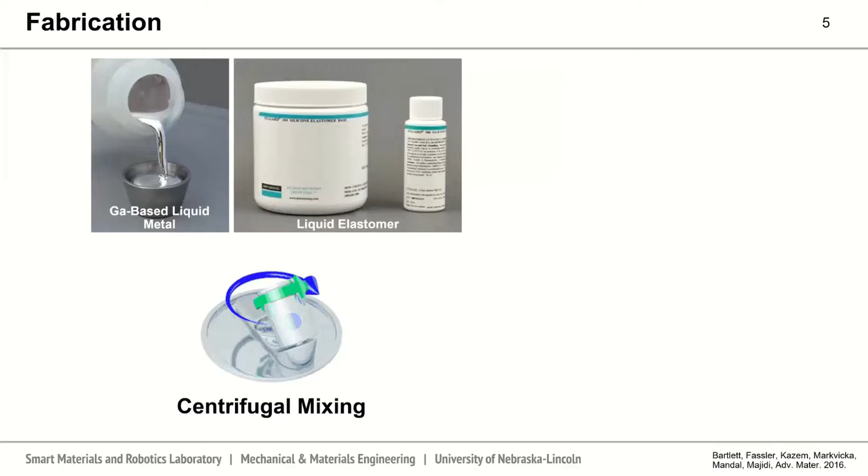We are focused on encapsulating this liquid metal into an elastomer composite. We do this by mixing some volume ratio of the liquid metal plus elastomer, and combine this in a centrifugal mixer. What we get out of this is the formation of droplets within the composite. They're independent droplets, as you can see in the nano CT scan on the right, with no droplet-droplet interaction. So even at very high volume loadings, up to 80% by volume, we're able to create composites that are electrically insulating.

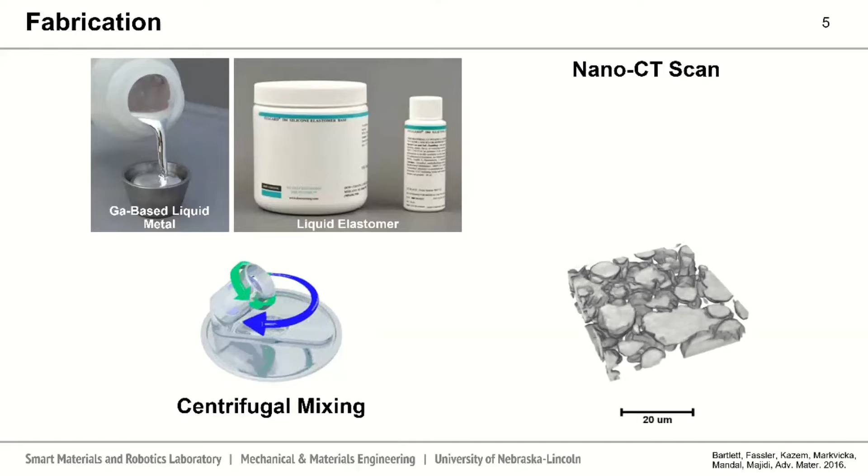This is important, especially if we talk about potentially thermally conductive elastomers. In some cases, we want these to be electrically insulating. Here is a graph that shows the thermal conductivity of these composites as a function of the volume loading of the liquid metal in the composite. We see an increase as the loading of liquid metal increases from 0 to 50% by volume. One really unique aspect of this is we see a negligible change in its modulus as a function of loading all the way up to 50%, while remaining very highly elastic, having strains up to 600% before break.

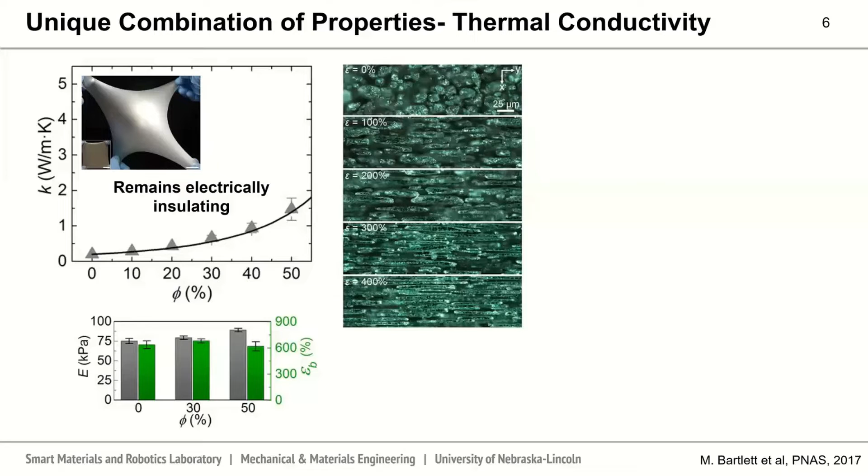Due to the liquid phase nature of the filler, the liquid metal droplets actually deform along with the elastomer matrix as a function of stretch. In the top image, you see spherical droplets in the elastomer matrix. In the bottom image, at 400% strain, you see long needle-like inclusions. If we measure the thermal conductivity in the direction of strain, we actually see a significant increase compared to the base elastomer matrix. This increase in thermal conductivity begins to approach some rigid metals, such as stainless steel, and is ultimately a 50x increase over the original host elastomer composite when strained up to 400%.

It's a pretty unique combination of properties. This material is soft and rubbery, but then exhibits some properties only really seen in rigid metals, such as very high thermal conductivity approaching 10 watts per meter Kelvin. This is really where the first project I'll talk about today comes in: lightweight liquid metal elastomer composites. This work was led by a graduate student in my lab, Ethan Krings, in collaboration with two other groups at the University of Nebraska-Lincoln, led by Jeffrey Shield and Sangjin Ryu.

So what I've shown up to this part is usually to get these highly functional properties, these elastomer composites are typically loaded up to really high volumes, up to 50% by volume, or greater than 85% weight of the liquid metal. And this large mismatch in the density of the elastomer and the liquid metal filler is really problematic to weight-sensitive applications, such as aerospace, and also large area electronics and thermal management.

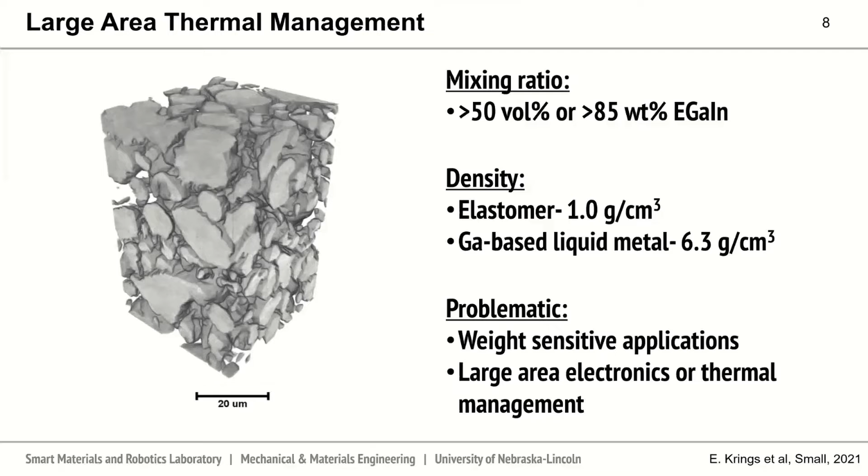So in this project, we began to try to understand and uncover the influence of the properties of the filler on the ultimate properties of the composite. Here we're looking at the density of the particle filler on the left as a function of the loading of this particle filling elastomer matrix.

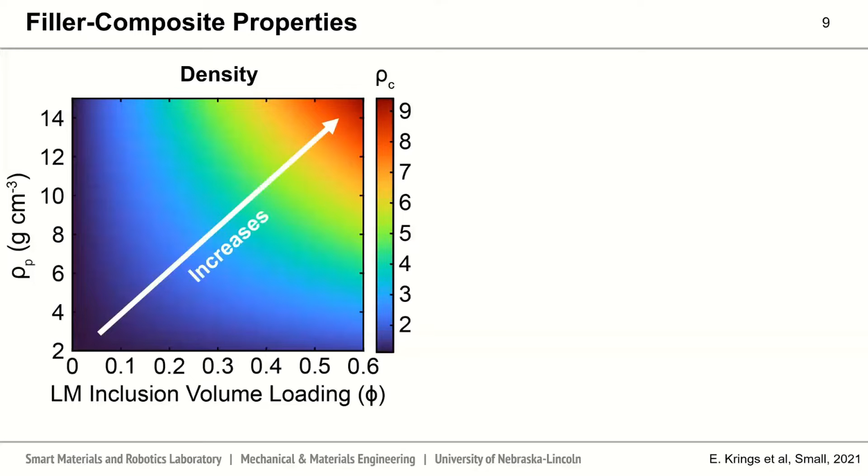The color map describes the density of the composite. And what we see here, and sort of as expected, as the density of the particle filler increases and the volume loading of that particle filler increases, the density of the composite increases.

If we look at the thermal conductivity of the particle filler as a function of the volume loading of this particle filler in the composite, where the color map shows the thermal conductivity of the composite, we see a different trend. We really see a major increase in the composite thermal conductivity only as we increase the volume loading of this filler within the elastomer matrix. And we see nearly constant thermal conductivity after some level of thermal conductivity of that particle filler.

So to conclude this, we see that the density of the particle filler is proportional to the density of the composite, which is as expected. We also know that the density of the particle filler is proportional to the thermal conductivity of that particle filler. But counterintuitively, the thermal conductivity of the particle filler is not proportional to the thermal conductivity of the composite, and remains nearly constant above some level.

So from this, we can see that if we decrease the density of the particle filler, we'll decrease the density of our composite, whereas if we decrease the thermal conductivity of our particle filler, we'll actually see a negligible change in the thermal conductivity of our composite. This offers us a new design space where we begin to optimize not only the functional properties of these composites, but also the density.

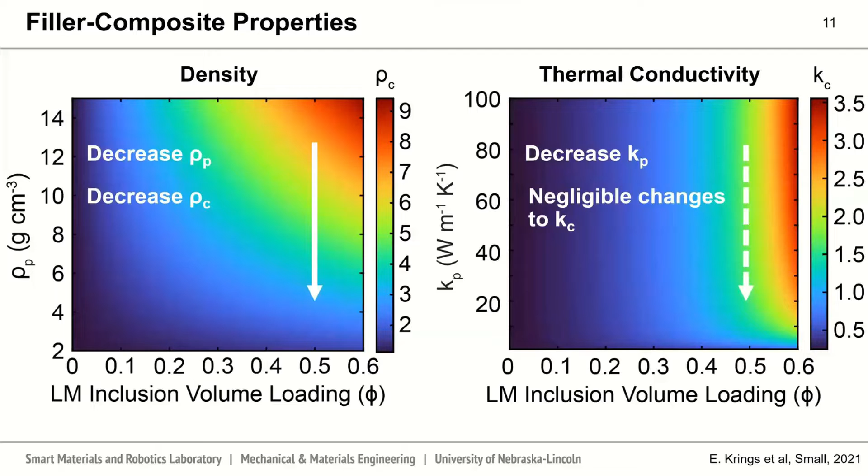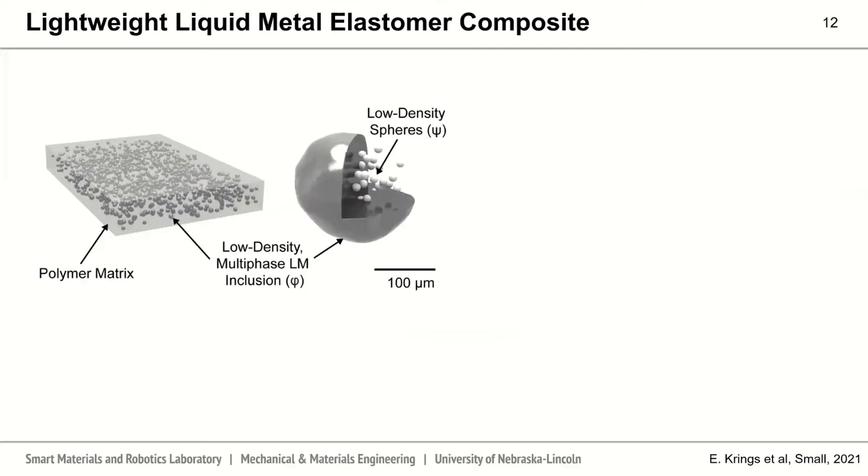So to do this, what we've done is we've introduced a secondary phase into this composite. Now we're introducing a low density phase into our liquid metal filler. This mixture is then loaded into the elastomer as before.

This nonlinear relationship then allows us to independently tune the density or thermal conductivity or the functional properties of this composite.

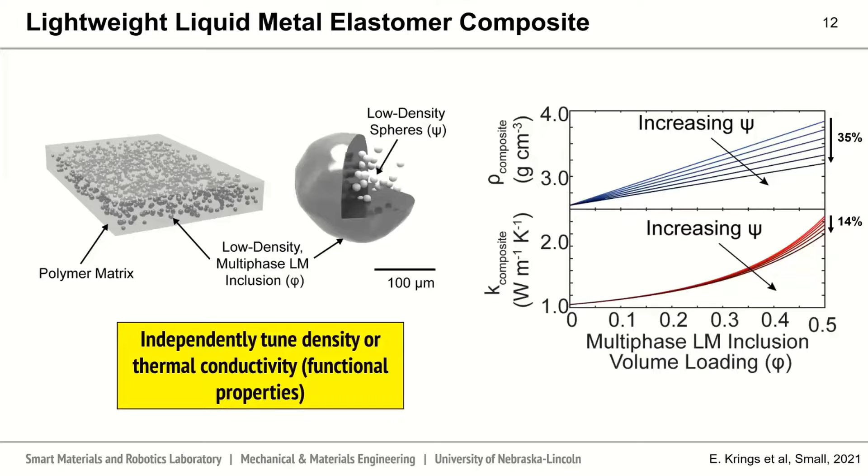Finally, we can create a design map from this. So we see the volume loading of the low density phase on the y-axis within the multi-phase filler, and on the x-axis we have the loading of this multi-phase filler into our elastomer composite. The color map shows this ratio of the thermal conductivity of the composite to the density of the composite.

And on top of this, we can draw lines of constant thermal conductivity, shown in black, or lines of constant density, shown in white. This really opens up a very large design space, right? The addition of this low density filler adds this design space from the y-axis of this plot. So we add a bunch of freedom and tunability into this composite by adding a second phase to our liquid metal filler.

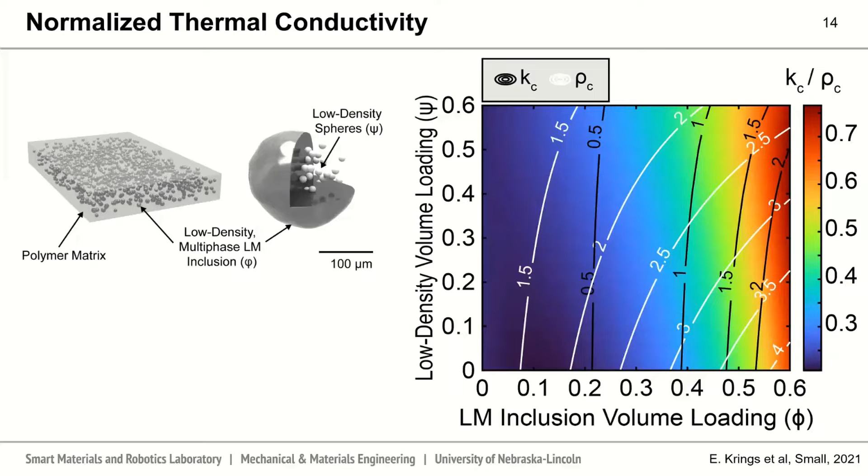From this, we experimentally verified this theoretical model. Our red line here is a line of constant density, where we're able to tune the thermal conductivity independent of the density of the composite. The blue line shows a line of constant thermal conductivity, so here we can maintain our thermal conductivity, but change its density for our application.

So here our goal is really to decrease its density. The images on the right show these three samples suspended within a column of heavy liquid, where we have samples that are able to float in this column, ones that sink, and ones that are suspended in the middle.

The image on the right then shows each of these materials pulled out of the liquid and used as a thermal heat spreader, where there's a resistive heater embedded within each of these, and we see a very similar thermal response to this applied heat load. So this verifies that we're able to independently tune the thermal conductivity and density of these composites by introducing a new phase into the liquid metal.

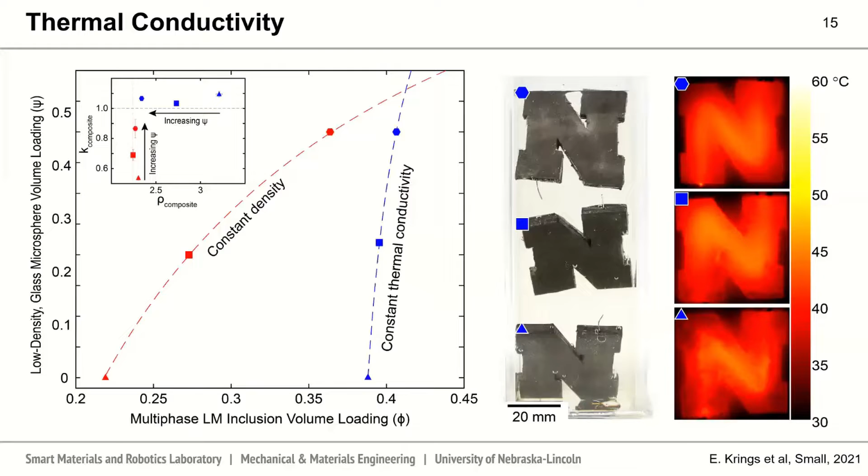The next aspect of this work leans towards additive manufacturing to enable spatial control of the microstructure of these liquid metal droplets within the elastomer composite. This project was in collaboration with Michael Bartlett's group from Virginia Tech, led by Aaron Haake from my group and Ravi Tutika from Michael Bartlett's group.

We are also interested in tailoring the thermal conductivity of these composites. At this point we have two knobs to do that: we can increase the loading of the liquid metal within the elastomer composite to increase thermal conductivity, or we can increase the aspect ratio of the liquid metal filler within the composite, which increases thermal conductivity in the direction of that change in aspect ratio.

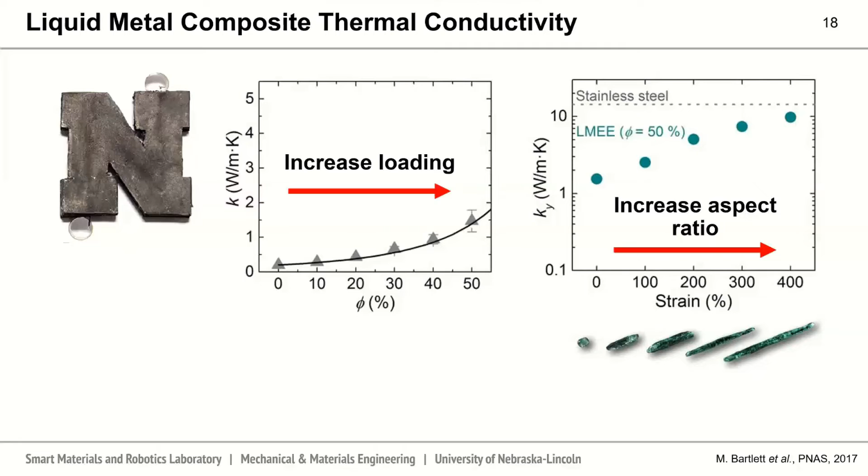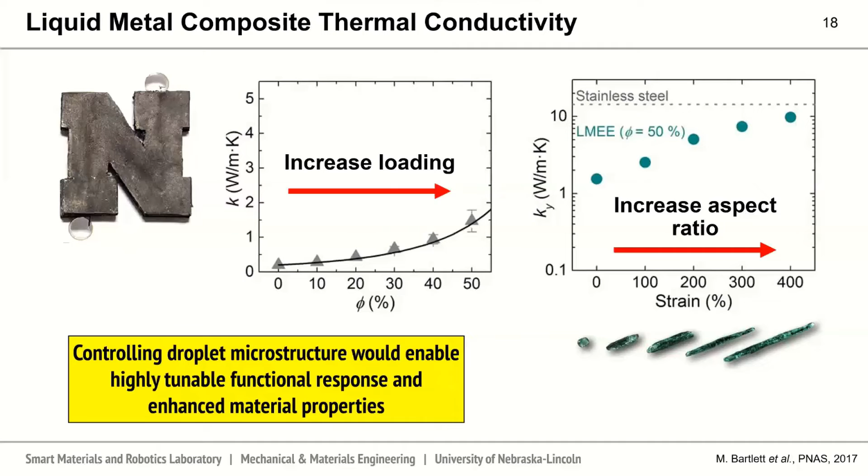However, at this point, the only way we can achieve a change in aspect ratio is through mechanical stretching, which ultimately leads to programmability in only a single axis. We see that controlling droplet microstructure would enable highly tunable functional response and enhanced material properties if we were able to spatially control that throughout an elastomer composite.

Through looking at literature, we see that alignment can be caused by shear forces during direct ink writing if the ink includes high aspect ratio fillers. These fillers align as they move through the nozzle.

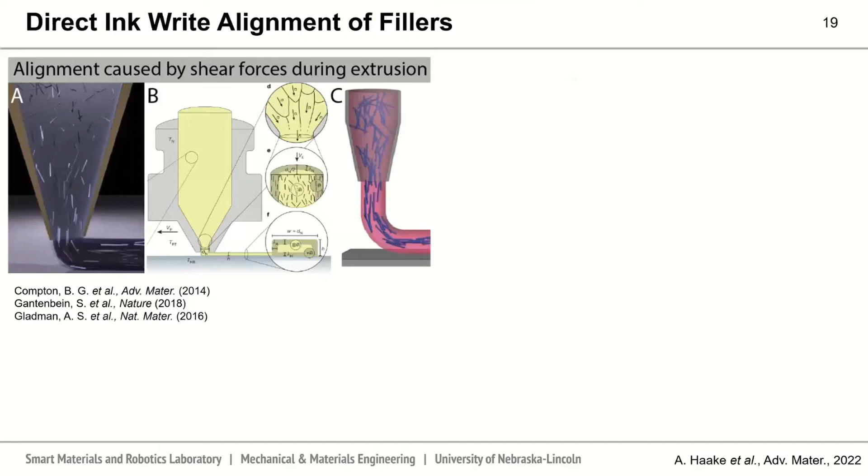If we print the elastomer composite as an emulsion - liquid metal droplets within a prepolymer matrix - we see almost no visible change in the microstructure of the liquid metal droplets before and after printing. Even looking at a zoomed-in microscope image of the nozzle as the material is extruded, we see primarily spherical droplets throughout the length of the nozzle before and after extrusion.

We hypothesize that solid-liquid emulsions offer new opportunities to not only control the orientation of particle fillers, but also the shape of the liquid inclusions during direct ink writing.

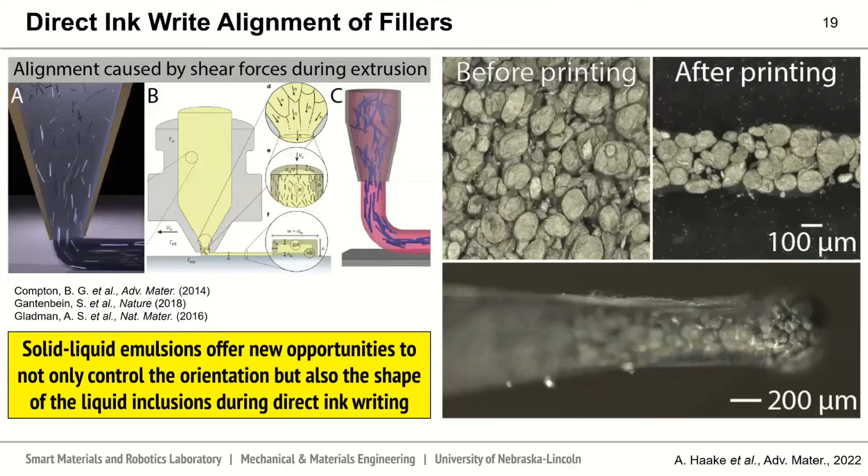For this, we did a parameter sweep and looked at two specific parameters: the non-dimensionalized printhead velocity - the ratio of printhead speed to extrusion speed - and the nozzle height with respect to the print bed.

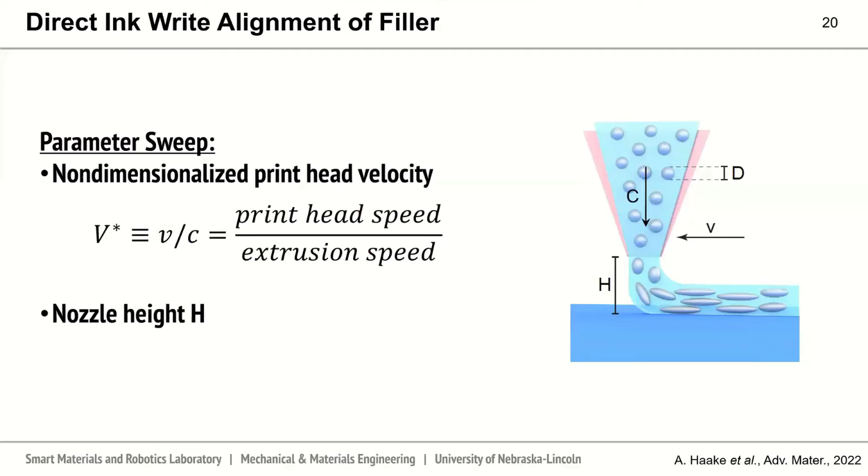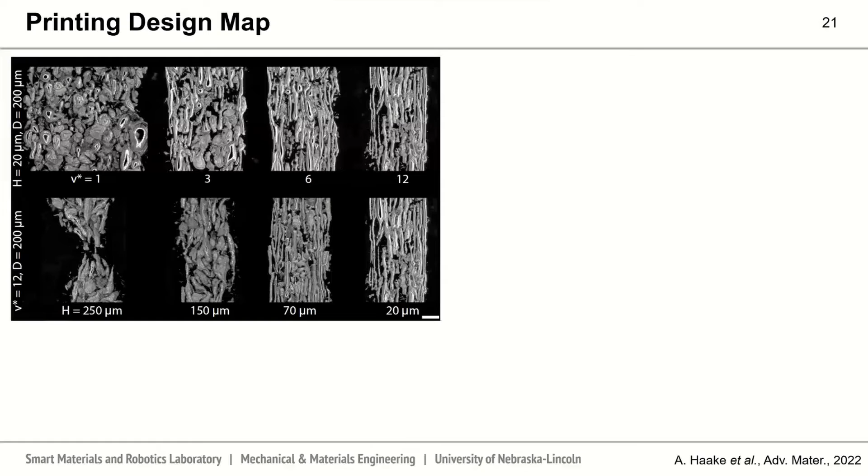We observed a change in aspect ratio as V-star, this normalized velocity, is increased from 1 to 12. We also saw an increase in aspect ratio as the height of the nozzle with respect to the print bed is decreased from 250 microns all the way to 20 microns. From 16 independent experiments of velocity and height, we were able to formulate a design map.

We see on the left hand primarily spherical microstructures, all the way to needle-like microstructures on the right, in about a distance of 13 millimeters. So we're very quickly able to change the aspect ratio of these particle fillers throughout a printed part.

With this, we're not only able to change from spherical to elongated droplets, but we can actually go back and create connected networks from any of these microstructures within the materials. This is enabling in the fact that we are able to use a single ink, one nozzle, and achieve multiple properties throughout a printed part with spatial control.

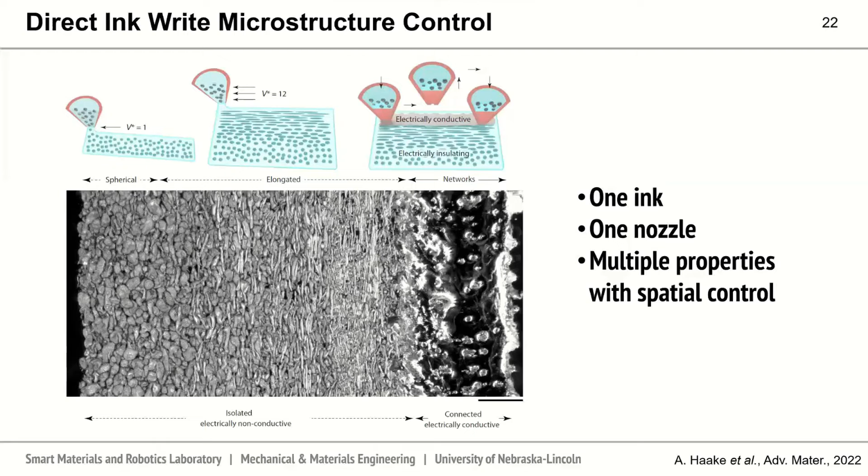We can begin to create unique architectures that have never been shown before - not possible with previous methods - such as curvilinear type architectures throughout a printed part. We can alternate within a single part between spherical and elongated droplets right next to each other.

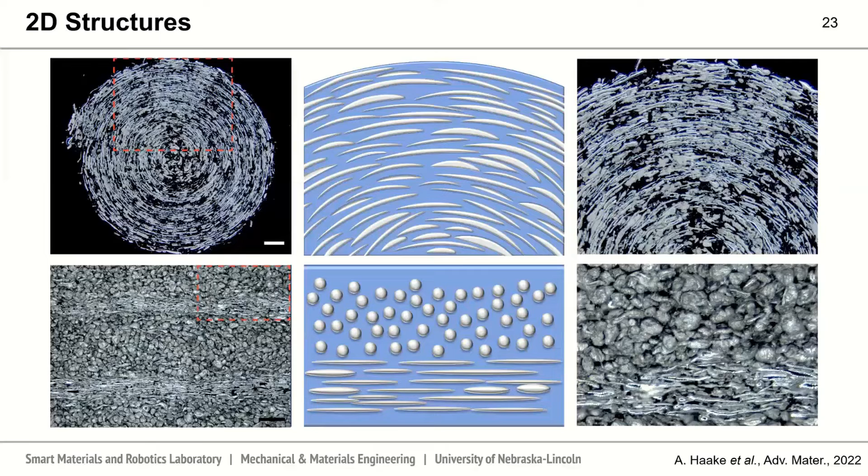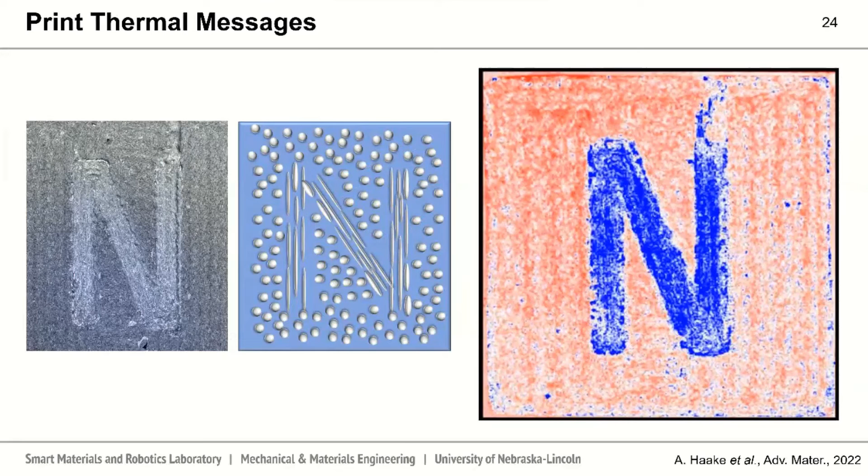We can start to print thermal messages. Here we have highly elongated droplets surrounded by spherical droplets. This allows us to encode a thermal message, or even create a heat spreader, within a material.

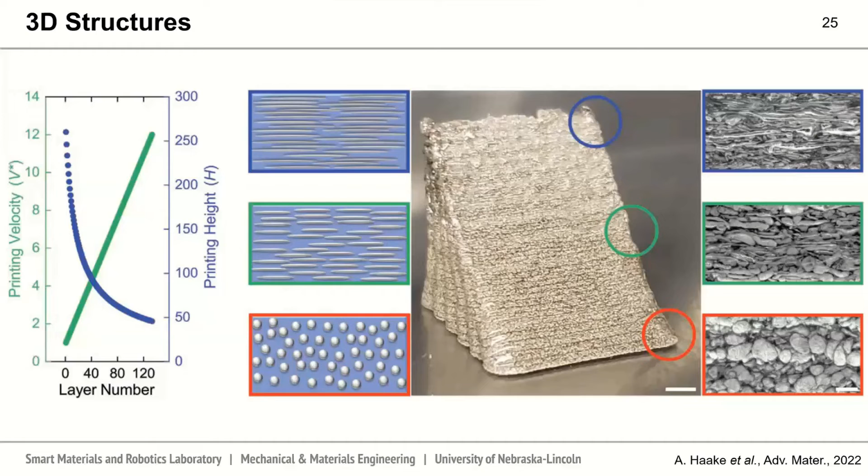We can expand this from 2D to 3D structures, where we begin to tailor the printing parameters - the normalized velocity as a function and printing height for each layer in our composite. This allows us to create layers with spherical droplets on the bottom all the way to highly elongated inclusions on the top of this prismatic triangle.

We can add other print heads to our 3D printer, and now we can do multi-material printing, so we can embed highly thermally conductive heat sinks within traditional elastomeric materials. As expected, we see significant reduction in the heat around the light emitting diodes located in the bottom left and top right corner, where these heat sinks or heat spreaders are embedded within the material, versus buildup of heat where the elastomer composite remains.

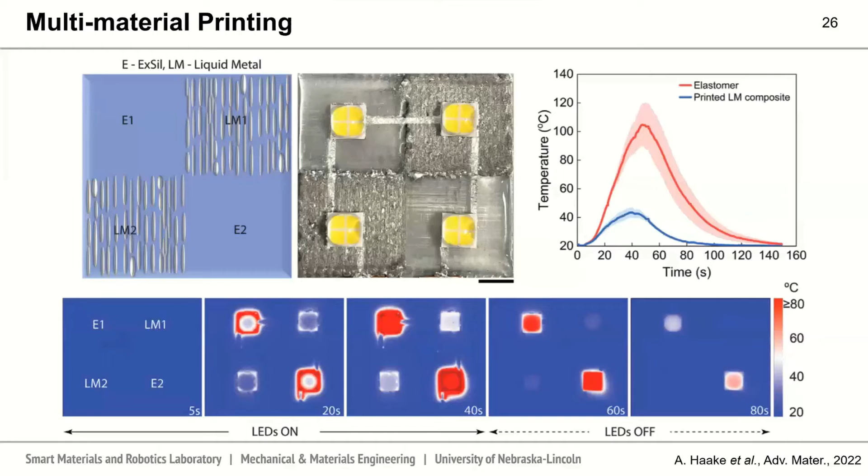Hey Melissa, I maybe have a question just to get the ball rolling here.

Eric, this is pretty interesting stuff here. But I just wanted to see, from your perspective, what sort of applications you have in mind. I could see this being a potential use for a space application, something like a heat spreader where you can finely tune something that's pulling heat away from a printed circuit board and control the thermal conductivity there. But did you guys have some applications in mind or some things you're already looking at?

Yeah, we envision this material could be used as conformal coatings within circuit boards. These could be complex geometries between mating parts that are currently potentially thermally insulating materials. Now we'll be able to potentially pull heat away while remaining electrically insulating. And then anything that interfaces with the human body, so potentially liquid cooling garments, things of that nature that require mechanical conformability but require highly functional properties.

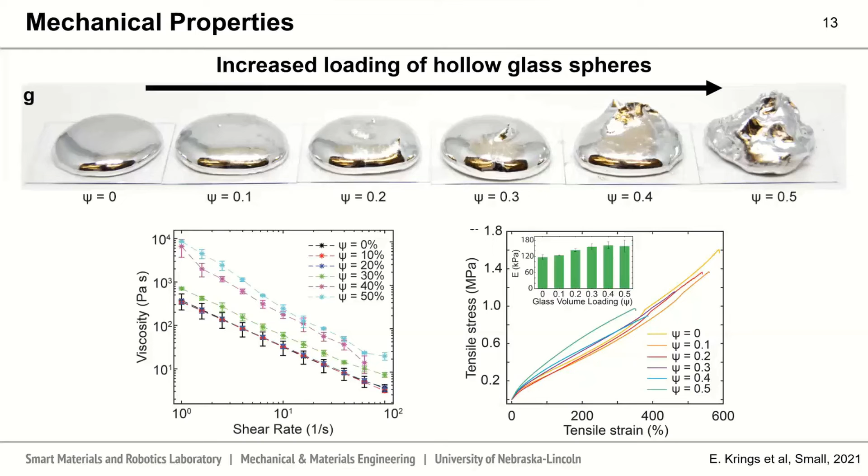That's actually something we're studying right now that hasn't been studied in literature yet. So understanding how the modulus of these materials changes as a function of its microstructure. Up to this point, we see very little changes. They're almost undetectable on some scale, and we are really trying to understand if these changes in modulus are a function of the printing and potential changes in chain alignment of the polymer, or actually a function of the microstructure of the liquid metal.

Another question Susan asks is, does the liquid metal influence the EMI shielding capability of the elastomeric polymer? Yes, you'll get... this isn't something we've studied, but it has been shown in literature that you will get an increase in EMI shielding performance as the loading of liquid metal is increased.

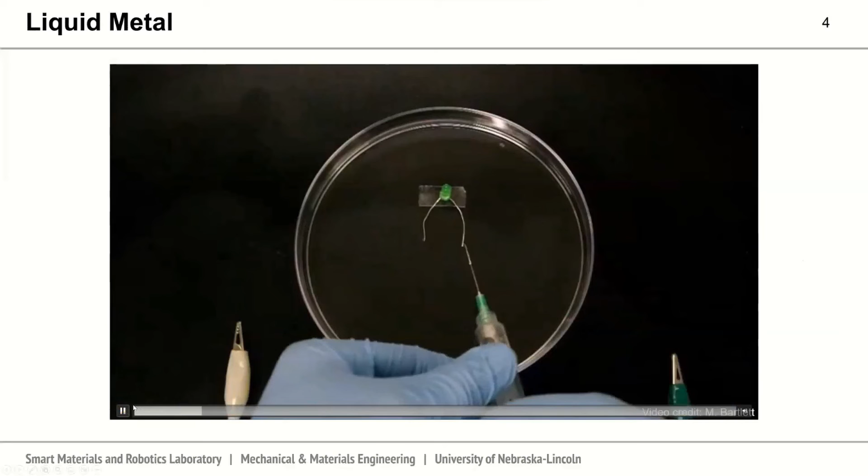Is there leakage of the liquid metal out of the elastomer matrix? Yeah, so there is negligible, almost no liquid metal leakage out of the elastomer matrix. One of the really unique aspects of the liquid metal is that even if a droplet were to be fractured, the spontaneous formation of the oxide skin prevents it from leaking out.

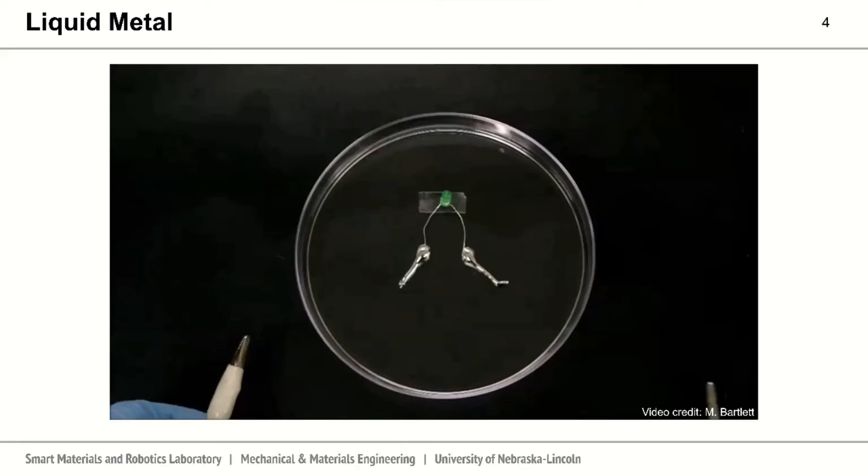And that's analogous to this, where the oxide skin almost spontaneously forms and really prevents flow of the metal. Yeah, if you make the droplets really small, somewhere around a micron or smaller, it then becomes really, really difficult to even cut through a droplet. So there are a number of techniques to ultimately prevent that from happening.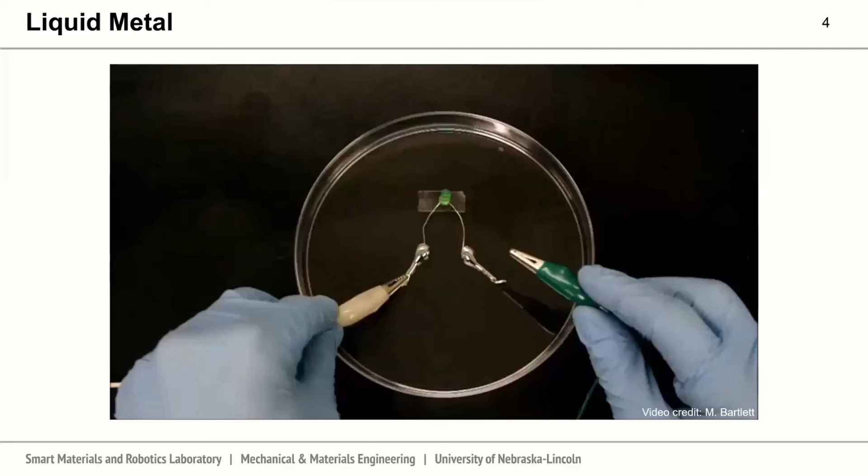Can you orient the liquid metal needles perpendicular to the print plane for enhanced thermal pads, or is it limited to the in-plane direction? That's a really good question. Currently our direct ink writing setup is primarily limited to the plane. You could potentially create a very tall, slender structure and orientate it perpendicular to the plane, though that might be difficult. There's also been research integrating ferromagnetic particles into the liquid metal, then curing the composite within a magnetic field to orientate it. But our direct ink writing process as is, is primarily limited to in-plane.

We have one more question related to the last one: can the liquid metal reseal itself in a vacuum environment? That's a really good question. I assume this is related to the formation of the oxide skin, which forms in the presence of minimal oxygen. We have collaborators at the Air Force Research Laboratory with a state-of-the-art glove box where they've tried to minimize oxygen, and they still get formation of the oxide skin. Studies have shown even as little as 10 parts per million oxygen can cause the oxide skin to form on these liquid metals. The dissolved oxygen in the elastomer or other materials is more than sufficient to form the oxide skin on these droplets. It requires very, very little oxygen.

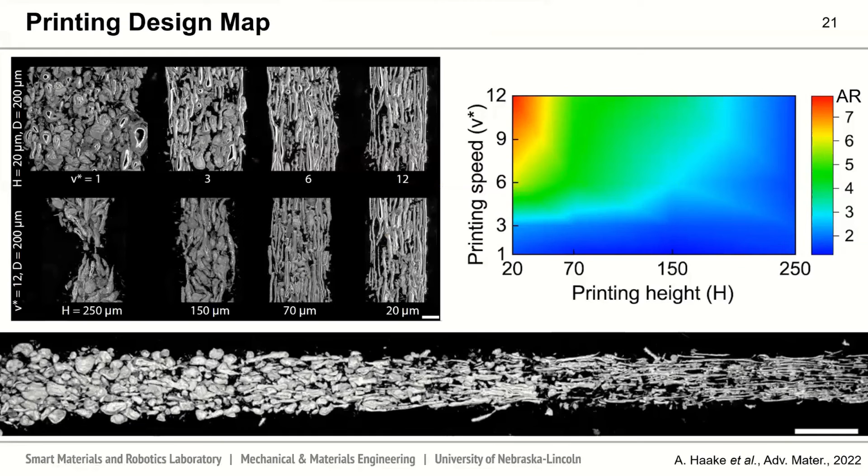Another question: rough estimate of the range of orthotropic thermal conductivity ratios, do you have a rough estimate? I had a graph in here, but it looks like I didn't include it. We see a pretty significant increase in the direction of strain of the thermal conductivity. In the perpendicular direction, in X and Z, we see almost a negligible change in thermal conductivity, almost no decrease. It remains almost nearly constant.

Another question, this one from Sean Breeding: do the droplets have a pore pressure? If so, how does the elastomer behave when subjected to a vacuum environment? Would it swell in thickness? That is a really good question. I don't think they have a pore pressure, but I would assume they wouldn't - I don't know, I haven't thought about that enough. We've definitely put them in desiccators under not-crazy vacuums, and they don't swell or begin to leak out, as we've been able to visually observe, but we've never looked at this on a microscopic level.

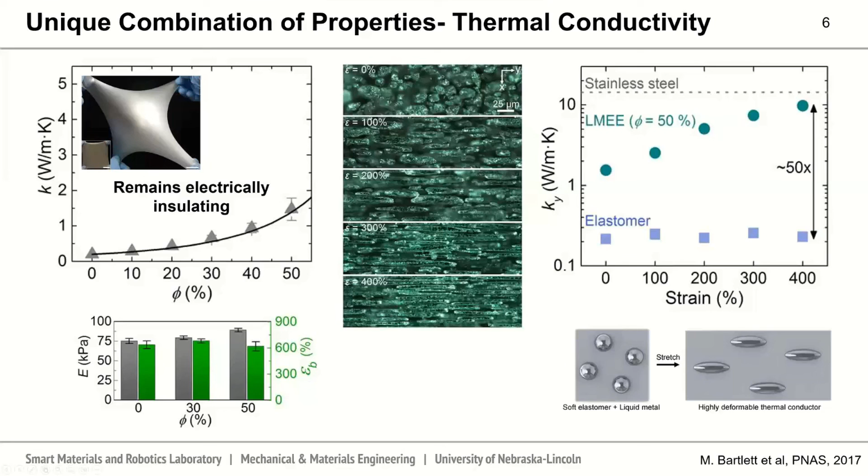Another question: does the liquid metal have a max allowable temperature, and does that differ from the elastomer? That's a really great question. The max temperature of some of the polymers we're using is a few hundred degrees Celsius, probably 250 to 300. The max temperature of the liquid metal is in the thousands of degrees Celsius, so it's beyond most of the polymers we use. One of the really critical temperatures is actually the minimum - when does it transition from liquid to solid? In its bulk state, its melting temperature is around 15 degrees Celsius, but if we put this into particles, we get a supercooling effect which suppresses this to negative 85 Celsius, which is around or after the limits of most of these elastomer matrices we're currently using, where we get a large increase in stiffness from the silicone before the change from liquid to solid state.